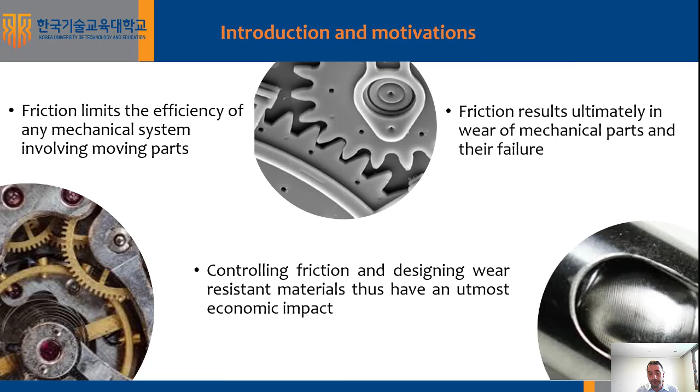Usually, friction and wear can be limited or retarded by using some lubricants. One essential lubricant are obviously the oil-based lubricants with some additives. However, we need to bear in mind that oil-based lubricants have some environmental impact, and some applications require to work in dry conditions. So in that case, we could think of using solid lubricants instead, or thin film coatings.

One very promising solid lubricant is graphene and other 2D materials such as boron nitride or molybdenum disulfide. So graphene has attracted a lot of interest in the tribology community, and it has been found that it has indeed very good lubrication properties.

However, we need to keep in mind that the lubrication effect of graphene really much depends on the orientation of the underlying substrate. So we showed recently that when there is good registry of the graphene lattice onto the lattice of the substrate, the friction coefficient of graphene is indeed very low. However, once we lose the commensurability between graphene and in that case copper, the friction coefficient increases dramatically.

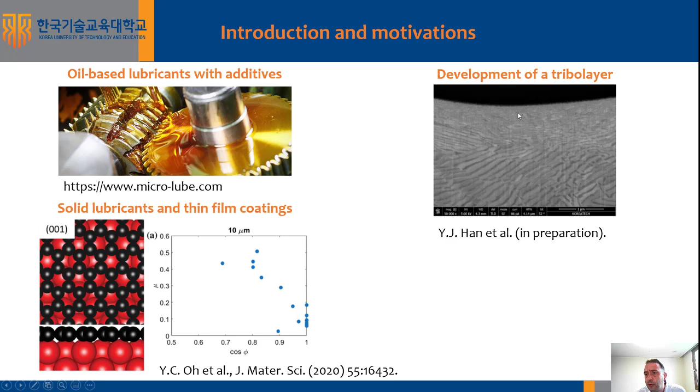on such a microstructure, we first deform the lamellar eutectic structure, in that case of a silver-copper eutectic alloy, and ultimately refine the lamellar structure until we in fact may mix copper and silver together with some oxygen to form a very nanocrystalline or maybe even amorphous tribo-layer.

So in this work I would like to discuss another solution to limit friction and retard abrasive wear on metallic glasses by growing a surface oxide. So metallic glasses are attractive alloys because of their high strength and because of their ability to be thermoplastically near-net shaped.

So metallic glasses are very hard, and from that perspective we would expect that their wear is very limited. However, the literature is not univocal about the tribological response of metallic glasses. One reason owes to the complexity of these alloys and their surfaces.

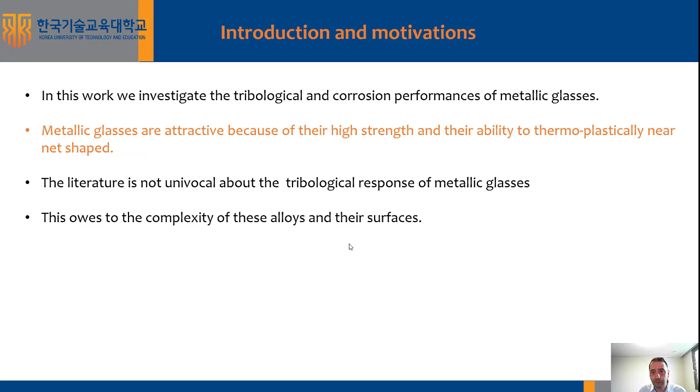So we need to keep in mind that metallic glasses are multi-component alloys with very often elements that are prone to build oxide layers, and for that reason the properties of the surface oxide may have a very large impact on the tribological performance of these alloys.

So if we consider some theoretical background of friction and wear, we may first need to consider that any engineering surface is never perfectly smooth, but that in fact the contact between two engineering surfaces will, in most of the cases, if not in any cases, initiate at some asperities.

Such asperities are at the nanometer scale, and in fact we will see that a single asperity can be well modeled by using an AFM tip, which has similar dimensions. But before we come to discuss how to model the tribological behavior of a single asperity, I would like to remind you that according to Bowden and Tabor, there are essentially two mechanisms that lead to friction and wear.

The first mechanism is the shearing of an asperity sliding onto a surface. So the shearing force can be described as the product of a shear strength tau times a contact area A between the asperity and the counter body that depends on the normal force.

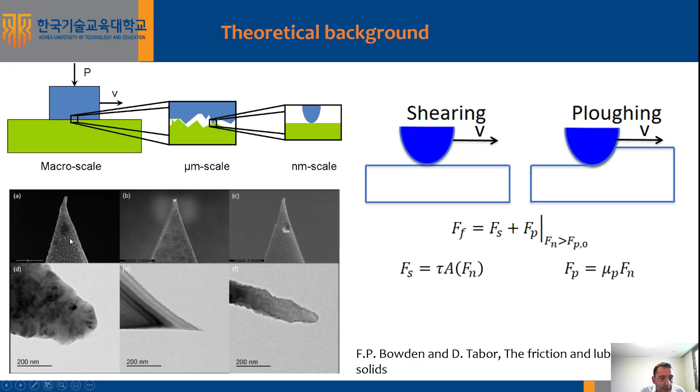In this work we used atomic force microscopy as a nanotribometer. I won't go in very much detail about the working principle of an AFM. I would just like to show you the principle of the nanotribological measurements. So essentially we slid the cantilever back and forth over a scanning area upon the application of a normal force, and the scanning was operated with a given velocity v.

So upon scanning, we can both record the topography evolution, which means we can determine image after image on the same area the evolution of the roughness. And after the full sequence of measurement, we can then image the worn area in tapping mode or in non-contact, for example, in order to determine the wear volume. Parallel to the topography measurement, we also can determine the friction force corresponding to each scan.

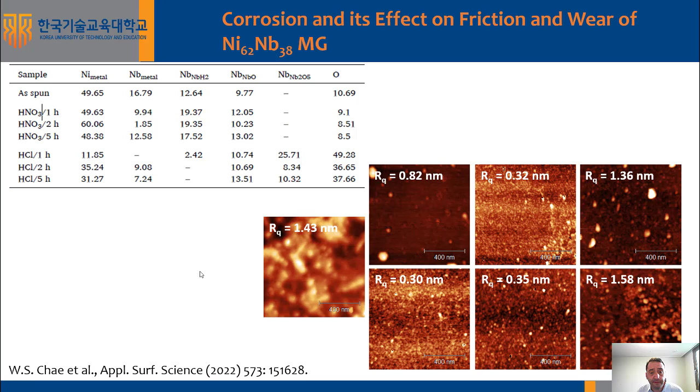Note the tip here was a polycrystalline diamond coated tip, and after scratching we observe a significant amount of pileups that speaks for really abrasion.

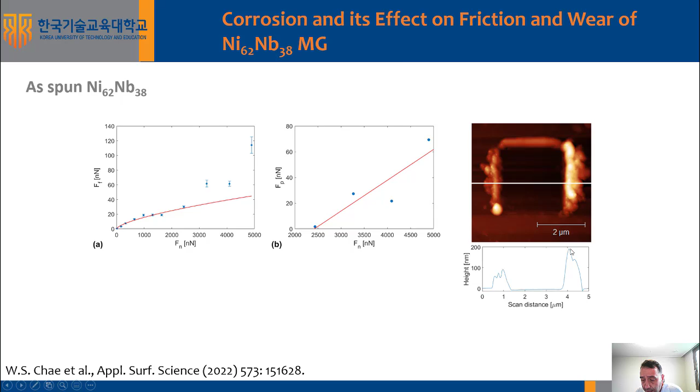So this is also confirmed by imaging the surface after scratching on these alloys, where we find now that the amount of pileups, or the height of the pileups, is much smaller than before immersion, where we had pileups that went as high as 200 nanometers, while after immersion into nitric acid, the pileups are only in the range of up to 30-40 nanometers.

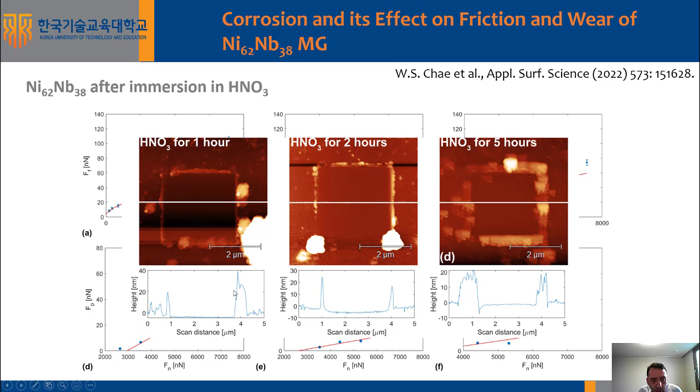Now, even more interesting is if we now grow a niobium pentoxide, we find that we completely suppress abrasive wear. We now only have shearing friction. Now, these points here are rather outliers that correspond to the transfer of sample material onto the tip, and maybe again the discharge of this transferred material from the tip.

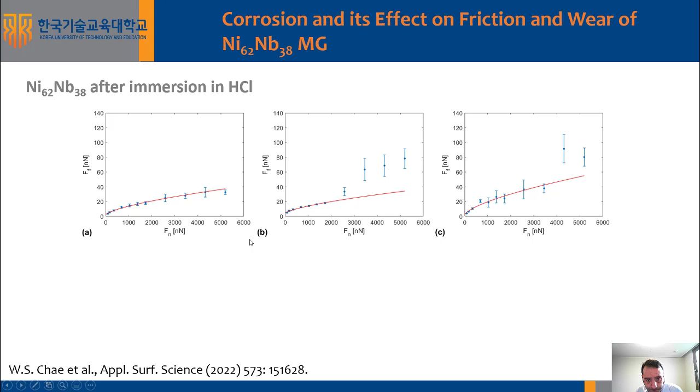So, correspondingly, we also find here that the pileups after 1 hour in hydrochloric acid are rather low. We do find some increase in pileups after longer immersion into hydrochloric acid. However, it rather looks like we are smearing the oxide of the sample surface as we would smear butter onto bread.

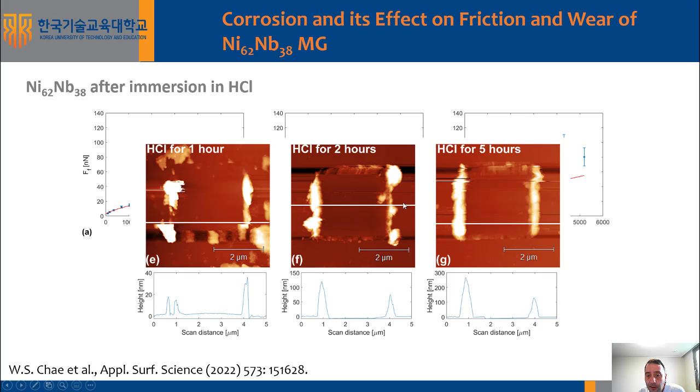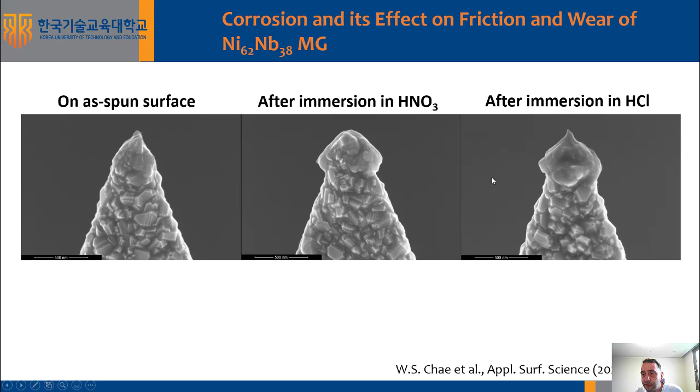After these measurements, we then imaged the used tips on the different surfaces by scanning electron microscopy, and we indeed find that the amount of transferred material at the end of the tip increases after immersion into acid, and that the amount of transferred material is the largest after immersion in hydrochloric acid.

So to finish this presentation, I would like to show you now some results obtained on zirconium cobalt aluminum metallic glass. The samples were produced by casting, so here we are dealing with a bulk metallic glass. Before scratching, these samples were mechanically polished, and we measured then the topography in the as-polished state, and after immersion for 8 hours in hydrochloric acidic solution with different molarities. So in one case it was 0.5 mole per liter, and in the latter it was 1 mole per liter.

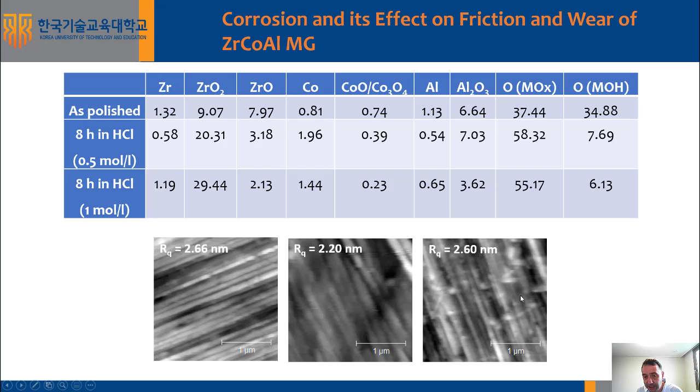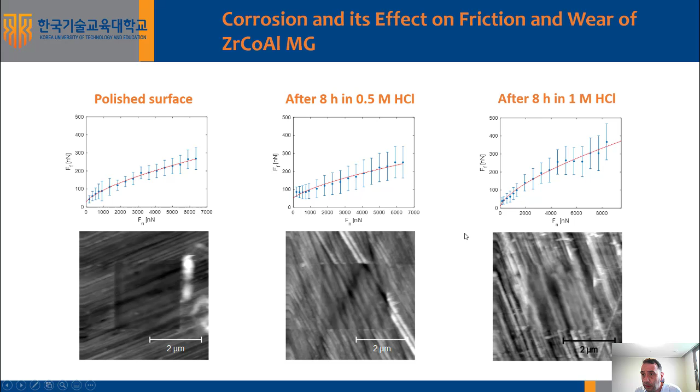And again, here we can fit our experimental results with the shearing model over the whole range of normal forces, and in fact we do not find a significant amount of wear on this sample. After immersion for 8 hours in 0.5 mole per liter hydrochloric acid, we again do not see much change on the surface. In fact, the determined shear strengths remain the same in the range of 1 gigapascal, and again a similar result after immersion in 1 molar solution of hydrochloric acid.

So with this, I would like to conclude that surface oxides retard the onset of abrasive wear and significantly decrease the friction loss. The properties of the oxides are, however, dependent on their growth conditions. So if we now compare the effect of nitric and hydrochloric acid, we find that chlorine ions may mechanically destabilize the surface oxide, which results in the smearing of the oxide layer upon sliding.

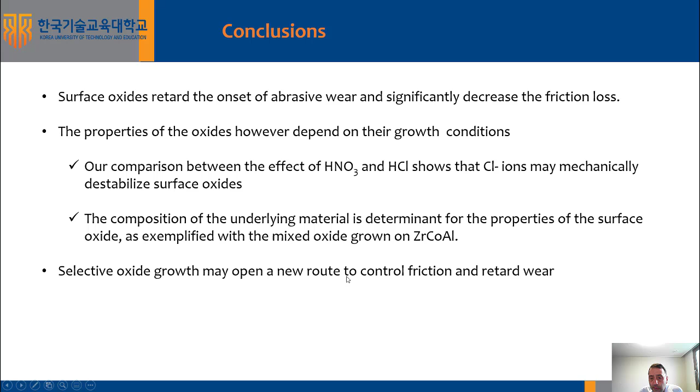Also, the composition of the underlying material is determinant for the properties of the surface oxide, as shown ultimately on the zirconium cobalt aluminum sample. So last, I would like to state that selective oxide growth may open a new route to control friction and to retard wear.